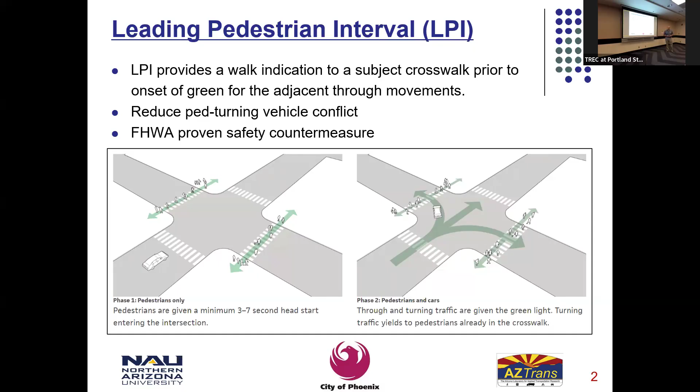All right, okay, so for those who may not be familiar with what a leading pedestrian interval is, it is putting the walk indication up 3 to 7 seconds before the concurrent green indication comes on. It gives pedestrians a chance to establish themselves out in the street, making themselves more visible, and also can give them a chance just simply to get off the curb in some areas. So these are used in a lot of areas in Portland, and it's a proven safety countermeasure. It helped us reduce that conflict between pedestrians and turning vehicles.

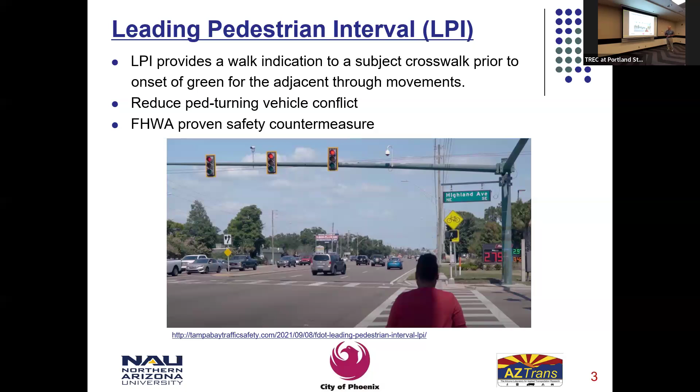Here's a picture of one of these in place. So we've got the walk indication up, and the signal indications are still red. So Phoenix wanted guidance on implementation of these, right? A complaint comes in from an alderperson: we've got a challenge at this intersection. Funds are limited. Even though these look very simple, just a simple signal timing change, there actually can be a lot more to it based upon the configuration of the intersection, existing equipment, things like that.

So Phoenix wanted a way to look at site characteristics and identify a way to prioritize locations. So we did a literature review just to see what was out there, because there are various other documents out there. City of Portland has one. We did a crash analysis, and there were two goals of the crash analysis. One is to get an idea of how intersection characteristics that we might have seen in previous published guidelines have impacted crash frequency in Phoenix, as well as to allow us to prioritize locations in the city for data collection, as we wanted to do a before and after study with and without an LPI.

We identified sites, we did volume analyses of these, collected data, and then did manual reduction to identify user behavior changes, a bit of modeling, and then we developed a guideline for the city.

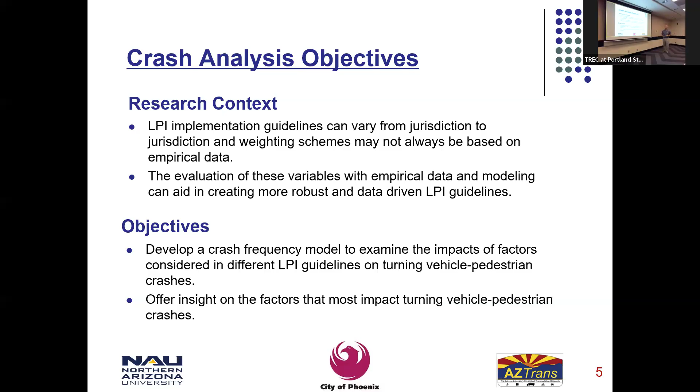As I noted in the previous slide, we wanted to identify the impacts of factors that have been considered in guidelines, as well as allow us to prioritize locations for data collection. So as part of the crash analysis, our students looked at all the intersections in the city of Phoenix. We had crash data from 2016 to 2022. We were looking at turning vehicle pedestrian crashes. We had just under 800 of those, and just under 2,000 total pedestrian-involved crashes.

Just for clarification, Dr. Russo led this part of it. So anyway, if something's wrong, it's his fault.

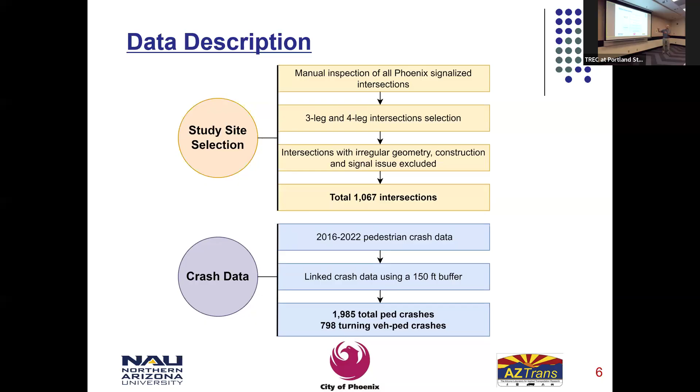Are there push buttons? Push buttons are an interesting thing because in a lot of locations in Phoenix there are push buttons, but they don't work. It just runs in pedestrian recall. For those that don't know what ped recall is, it's where we automatically bring the walk indication up every time with the concurrent green indication. Not sure why that's the case, but that's just part of the environment. Was there protected phasing? Are there exclusive left turn lanes? And some other items as well.

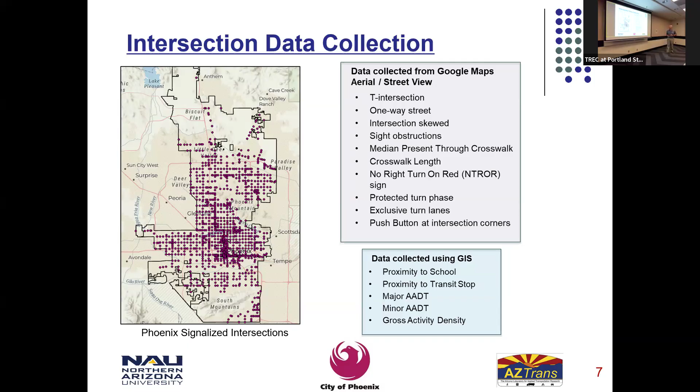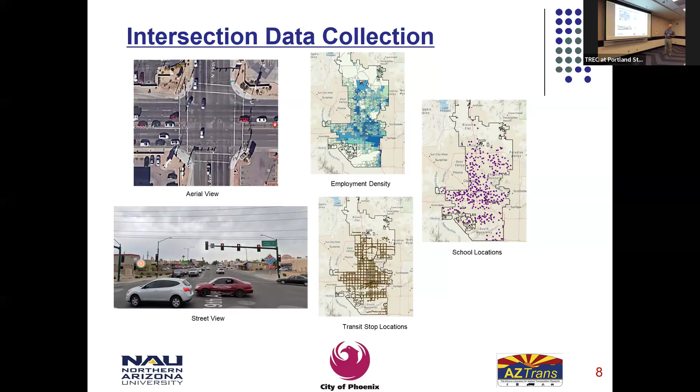So just a couple of pictures of what we pulled from this. So here's our locations of schools, transit stops. Google Street View and aerials were very helpful. As always, there's things that don't make sense when you look at that. There's construction, but we kind of worked through that. And then there's our employment density as well. So just some summary statistics from what we picked up.

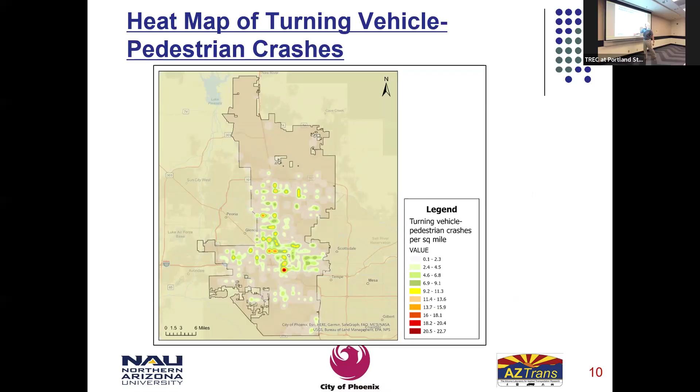Here's a heat map of our turning vehicle pedestrian crashes. This is our downtown Phoenix area. And then you do also see some other activity centers kind of around there in the uptown area. And here's another area where we have a reasonable amount of commercial activity.

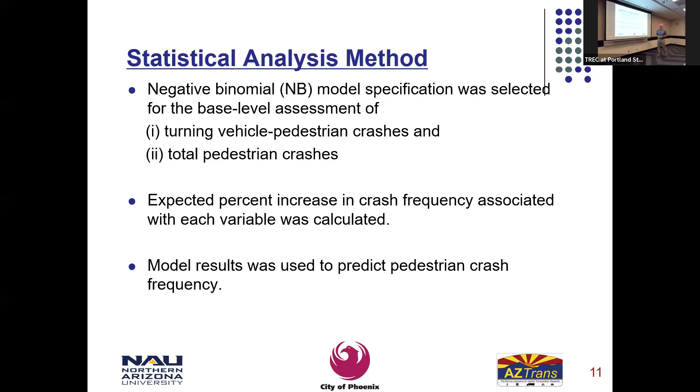Negative binomial models were used to look at the crash frequency as well as predict pedestrian crash frequency. And then we're looking at turning vehicle pedestrian crashes. So really looking at outcomes of the model, we see that if we have a crosswalk on four legs, we're much more likely to have crashes. Makes sense, more crosswalks, more conflicts, which is really, when you're looking at a model like this, you're asking, do these things really make sense?

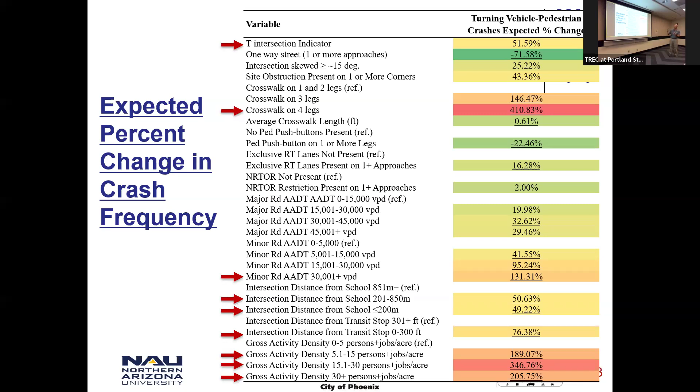Higher volume on the minor road, higher chance of having crashes, more activity, right? Although kind of that middle spot was our highest amount. And then our T intersection indicator was up here with 50% change. Again, a lot of these things actually appear in other LPI guidelines. They weren't specifically selected because we saw prevalence of them in the city of Phoenix.

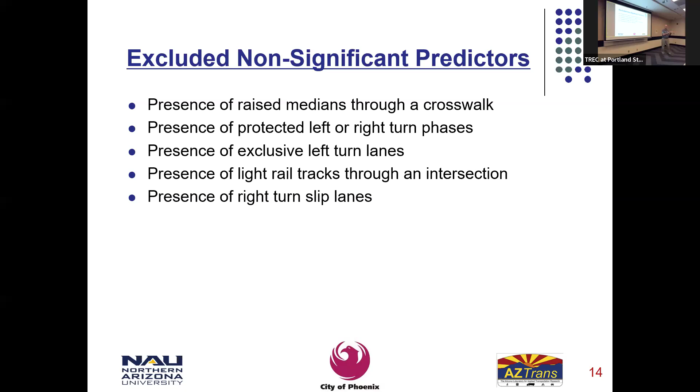Some of the things that were excluded: raised medians, right turn slip lanes, light rail tracks in the intersection, exclusive left turn lanes and protected right or left turn phases. These were not significant. If you haven't been to Phoenix in a while, we do have light rail. It doesn't cover a lot geographically, but it goes a long way, if that makes sense. It's probably 25, 30 miles from the center of the valley down to downtown and out to the eastern suburbs. So we're slowly building that network.

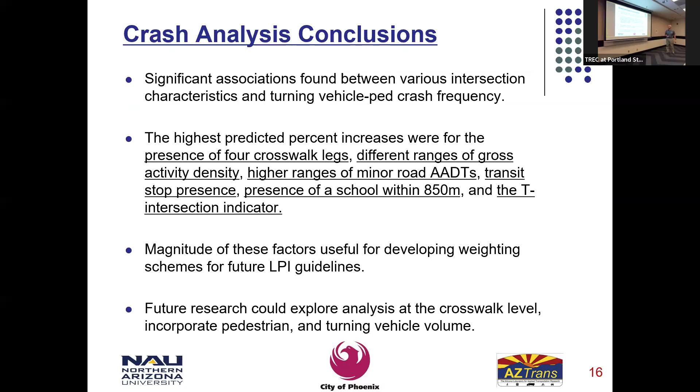Okay, so first we want to see what impact on expected crashes various intersection characteristics had, and the other purpose of the crash analysis is to get an idea of where we have a lot of these crashes as good locations that could be fruitful for the before and after study. We want to make sure that we have exposure, that vehicles and pedestrians are crossing paths often enough that we can actually get some good before and after data from it.

So the intersections that we selected are listed right here. We ranked them from highest to lowest crash frequency, and then we iterated with the sponsor on which ones made the most sense, what was going on around those intersections, things like that. Most of these are out in outlying areas, not really in the downtown area. Washington and 3rd Street is the only one that really is right in the downtown area.

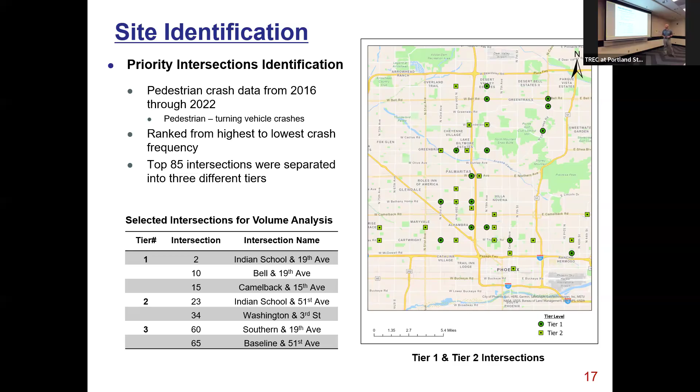So then, at each of these intersections, the city of Phoenix collected volume counts for pedestrians and turning movement counts from 12 to 1 and then 5 to 6 p.m. And when we look at the conflicts that a pedestrian has in the crosswalk, if I'm on this east leg crossing going north, I've got to watch out for vehicles that are turning northbound right, westbound right, and then southbound left if I have permitted phasing.

So as part of this analysis, certainly we looked at the number of pedestrians and number of turning conflicting vehicles, but we also did the cross product. And the cross product is something that you'll find in traffic engineering in other places. Specifically, one location is when we're looking at possibly installing left turn protection.

So with my left turning vehicles, I can use permitted only phasing if I have ample gaps coming at me in the conflicting through movement, right? But once I get to a certain number of vehicles coming at me in the conflicting movement and then turning left, there just simply aren't gaps available. The cross product is one of those things that's been used in literature in that area. So we looked at that as well here too.

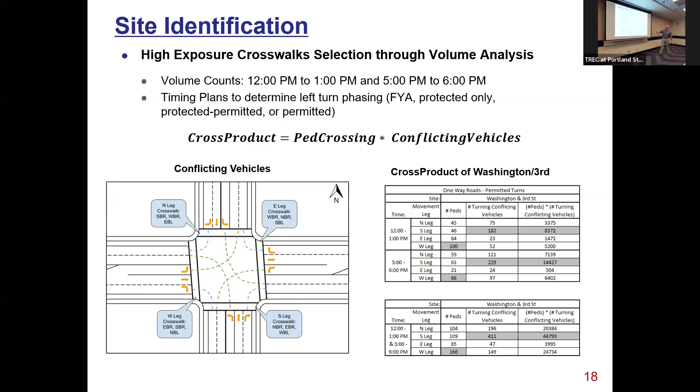So very simple. We looked at each leg during the two time periods, and then just looked at which ones had the highest cross product. Went through and just sorted those. We wanted to make sure that we had no more than 2 legs in any given intersection. We didn't want to have all our data collection at one intersection. We had a total of 8 locations budgeted, so 10 hours data before, 10 hours after.

So you will see that we did include Washington and 3rd, even though it is a little bit farther down the list; again, the outlined ones are the ones that we went with. This is one that our sponsor requested be part of the analysis, right downtown. It actually does have, by far, the most number of pedestrians, it just doesn't have that many conflicting turning vehicles.

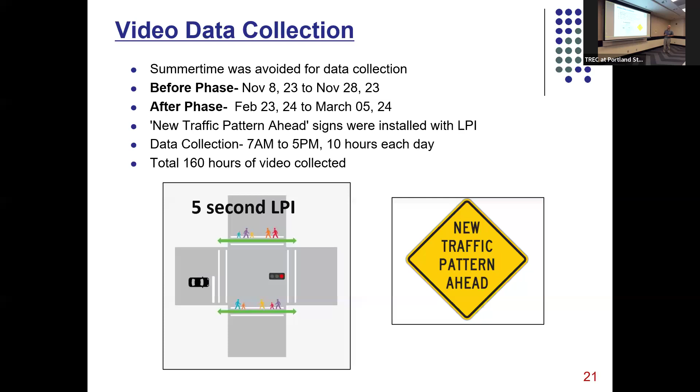So for data collection, we did post-encroachment time, right? Crashes are fortunately rare, and they're also random occurrences. And typically, if I want to identify the change in safety that some sort of countermeasure or geometric change will have at a location, I want at least 3, preferably 5 years of crash data before and after. That's not realistic for a study like this. So we use post-encroachment time. Post-encroachment time is simply the time difference between when one user vacates what we term a conflict zone to when the other user arrives there.

Okay? And when you look in the literature, typically you see if a PET value is less than 1.5 seconds or so, it's termed a severe conflict. 1.5 to 3.5 seconds is a moderate conflict, and then 3.5 seconds or greater is a minor conflict, right? Which doesn't really tell the whole story, because if one of these vehicles is standing still and the other one is moving, is that really that severe? So anyway, this is what we went with.

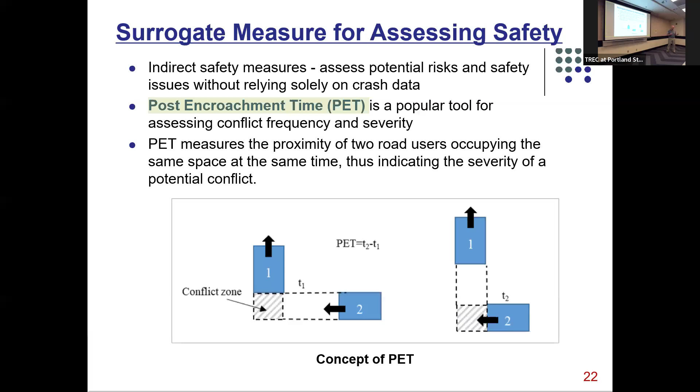What TTC is out there. Our time to collision, we chose to go with this one just because we thought this was the best thing we could get with the data collection techniques we had available for us. Right. So here's an example interaction. We've got this Nissan parked here in the crosswalk, just waiting to turn right. And then there's our pedestrian walking across. And then the vehicle goes ahead and turns right.

Does that look like a really severe conflict? Not really. I mean, presumably, this person, I'm a runner, and so I would make eye contact with this person if at all possible, or make sure that they see me in some way, shape, or form, right? So yeah, that's just one example of thousands of these data points that were collected.

One thing I will point out, and this is on our last slide, our limitation, is that at the onset and at the budgeting portion of the project, we were expecting to get event-based data out of the traffic controller. So we expected to be able to get the on and off times of all the phases, the greens, yellows, reds, walks, flashing don't walks.

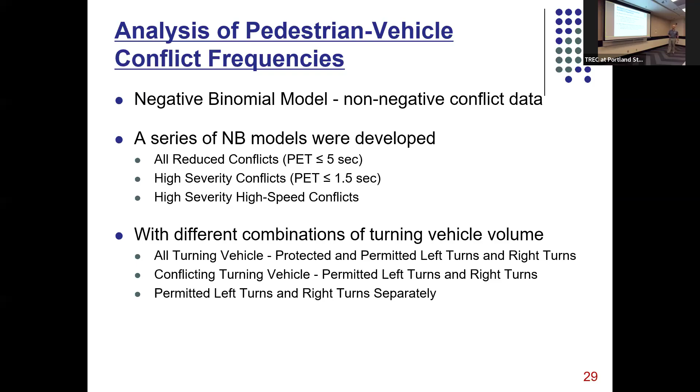This is what we mean by data-driven in the title of this presentation: this information, number of turning vehicles and pedestrians, went directly into our guidance that we provide the city of Phoenix.

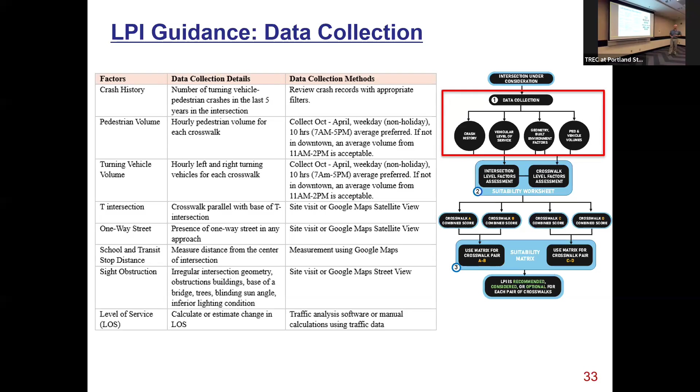So we've collected the data, right? And now we're actually pulling together a score sheet to get to a certain number of points. Based on the number of turning vehicle pedestrian crashes you have, if you have 3 or more crashes, you have 3 points. 2 crashes, 2 points, 1 crash, 1 point. If there's nothing, 0.

One-way street. Why might a one-way street be on this sheet? Well, driving behavior changes, right? When you have nobody coming at you and you're turning left or right, you're not acting the same way because you're not looking for that conflicting movement. So you may not be as observant to other things out there. Intersection distance from a school and transit stop: we've got more activity, it's more likely to have people out there.

And then the last one is travel delay. This one we went around the room quite a bit, and with Phoenix, to get to a level of what we use for a penalty for travel delay. This can be a contentious subject, whether you should have anything in here at all. It really depends upon the agency. One of the things I talk about in my traffic engineering class is trade-offs. Everything is a trade-off in traffic.

I-17 is the main freeway, the only freeway that goes from Flagstaff to Phoenix. On one of the slides I have a picture of a speed limit sign that says speed limit 80. We only have 75 in Arizona, but it says 80 and speed limit 10. And I say, well, what happens to safety if I bump the speed limit down to 10? It's going to increase, right? Well, still a fatality because someone will probably have a heart attack.

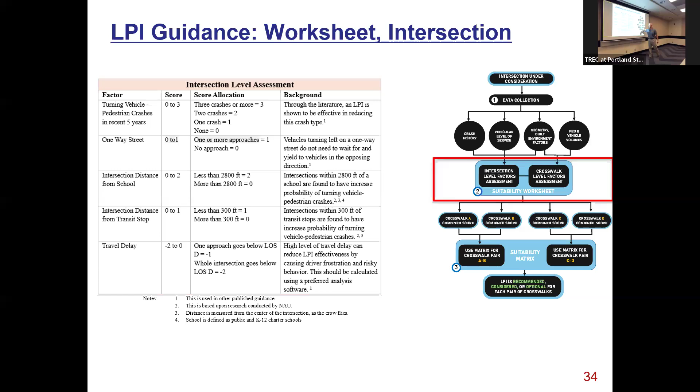But is that reasonable? Is it reasonable to ask those facilities to operate at that? So I take my 2-hour drive to Phoenix and turn it into a 15-hour drive. Everyone has different opinions on that. That is why we have a travel delay penalty. So when one approach goes to a level of service D, there's a reduction of a point. If the whole intersection goes below level of service D, you drop off a couple of points.

Looking at the crosswalk level, this is the modeling that we did: our pedestrian volume, looking at what our break points were. So more than 100 pedestrians, we have 3 points, and so on and so forth. Turning vehicle volumes, 100, 400, and 600 were our cutoffs for that.

T intersection. This is similar to that one-way intersection where if you're in a T intersection, you may not have conflicts from all directions. So you might have a higher vehicle speed. You're not waiting for traffic. Sight obstruction or a skewed approach: if you're looking over your shoulder like this to make your turn, you're maybe less likely to see the actual pedestrian that's out there.

One thing you'll note, you'll see our footnotes down here, items with a 1. This is used in other published guidance. So part of our literature review is to dig in and see all the different types of guidance that were out there. There's generally 2 types of guidance. There's prescriptive and descriptive. Prescriptive is something similar to this with a score sheet, and descriptive is more flowcharty, where there's just kind of, well, this is going on, you should look at this, consider that. We try to hit right in the middle of that. Items done by us, and then there's also some information on how to actually collect the data that you're going to use.

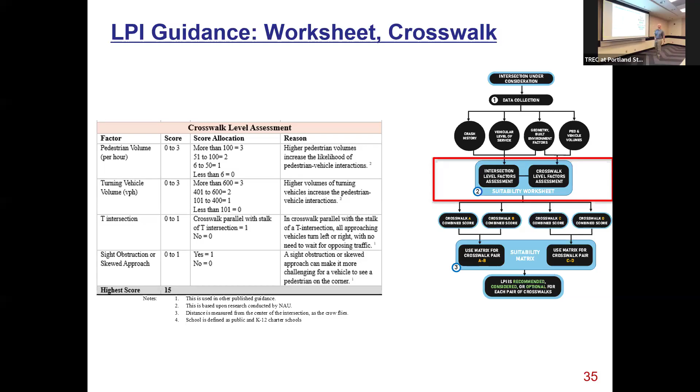Right, so once we have scores, we take the scores, and we always evaluate crosswalks in pairs. Why would I want to do that? Well, you want to implement it in pairs. We looked at this from a standpoint of making sure that the walk indications come on at the identical time on both sides of the intersection for those that may be using the sound of the vehicles to start to cross. And that's a whole other discussion with an LPI. But that was one of the reasons we went with that.

So we look at them in pairs, and we pull together scores, and then we determine, and this is where the legal wording comes into it, whether an LPI is optional, considered, or recommended. We chose those 3 words specifically because we're aware that this is a proven countermeasure. But it's not reasonable, or may not be reasonable, to put these at every location in the city.

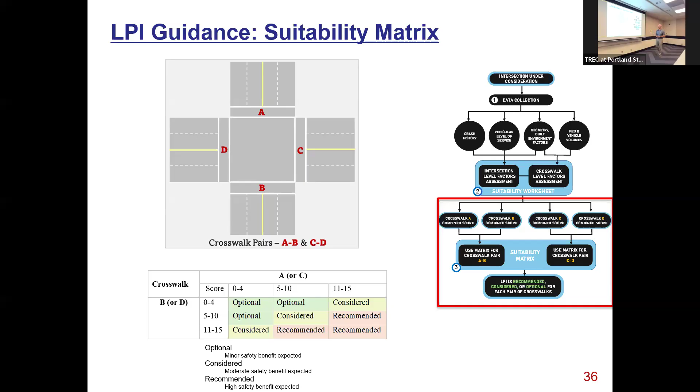At locations with LPIs, left turn protection should lag the through movement only. We actually saw this in our implementation process, where people would continue to turn through the all red into the LPI if there was a protected arrow prior to that LPI. Flash yellow arrow: hold that indication red until the LPI ends. We used 5 seconds. You can use different durations for this.

Number 7 is something that I will admit, and from talking to Simon, our contact at the City of Phoenix, most of Phoenix runs coordinated to a big grid. So your analysis for the vehicular delay can't just be at that one intersection. You really have to look at the whole corridor. Because if you're changing the onset of the green by 5 seconds on a coordinated movement, if we just do the one location, that's going to cause challenges up and down the corridor. So there's a bit more to it.

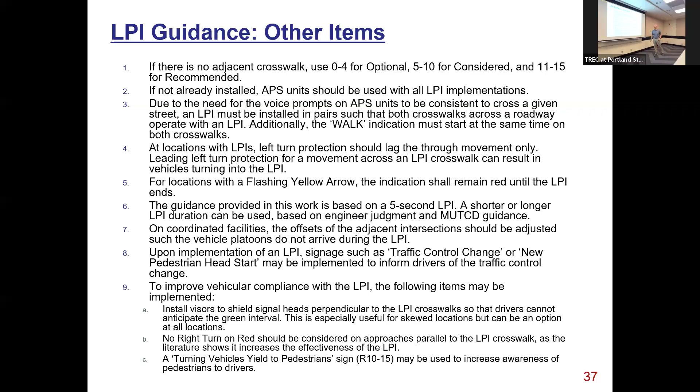But as I noted, there was also a lot of other good information in this project. One of my students, he's a PhD student now, Tony Yeshin, spent a whole summer waving his hand in front of a pedestrian push button. In our lab, we hooked up 2 different push buttons from 2 different vendors, and then just looked at, if you waved your hand here and there, how many times did it actually activate. He actually broke Steve Gerke's space heater because he used it to heat it up, because what happens in Phoenix? The button gets hot. Does it change behavior, right? We turned the lights off, did all sorts of stuff.

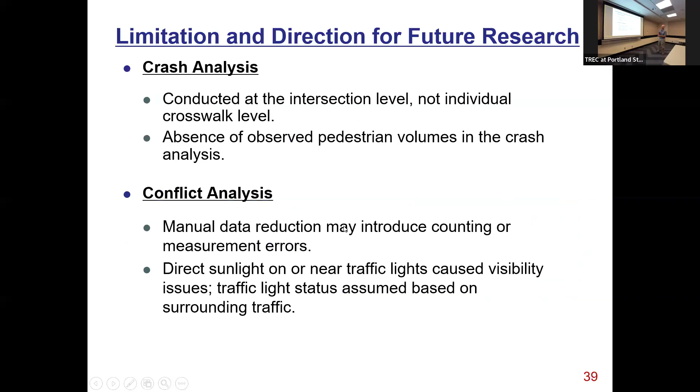The crossings you chose, were they crossings of major streets or minor streets or both? So the crossings were all pretty much major streets, driven by our crash analysis, where we had the most issues. I'm going to insert a quick question here that was related. Did any of these have median refuge islands? Let's go look. There we go. I wouldn't call it refuge, but you could. Phoenix doesn't do, at least at none of these locations, a 2-stage crossing. Okay, question in the room?

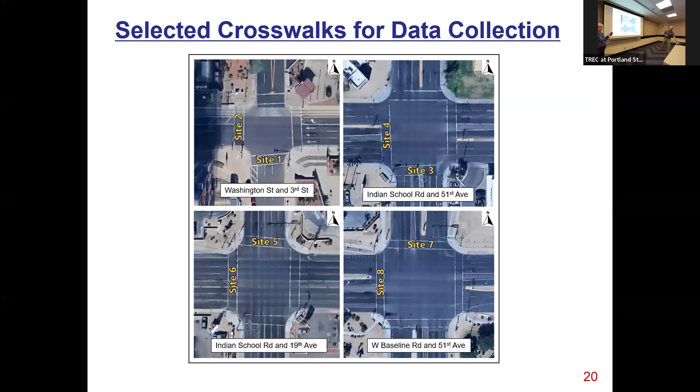What was the average crossing time of pedestrians? So these are typically 110-foot streets, so 3.5 feet per second, 110 divided by 3.5, 25, 30 seconds. Yeah, but you didn't measure how long it took the people to get across. We did have a speed. I don't know if you gave the data. Yeah, mean pedestrian speed. So it's pretty quick. I'm sure somewhere in your analysis you have how long it took them to get across. Travel time.

I don't think we measured that. I don't think we measured time from when they left the curb to when they got across. It's just interesting with LPI. It's like, okay, does that change it? Like, what is 5 seconds of a 40-second crossing, or for older adults, it might take longer. Yeah. I mean, you could extrapolate it out based upon that, but that's just based upon a little bit of.

Okay, I'm going to pick one of the maybe meatier questions here. It looks as though you considered each intersection as an independent site. However, some elements are bound to be related. For example, driver frustration because of delay is bound to be cumulative across the network. Do you think your results might vary if you were able to account for spatial relationships or dependencies among intersections? You did acknowledge that this is a network, but...

I mean, any study is going to be improved if I have access to more variables, more data to understand that, right? It's a good idea for something that will be funded by a UTC or something like that, but I can't see a city wanting to fund something like that. That's a great idea. It's a reality of research there.

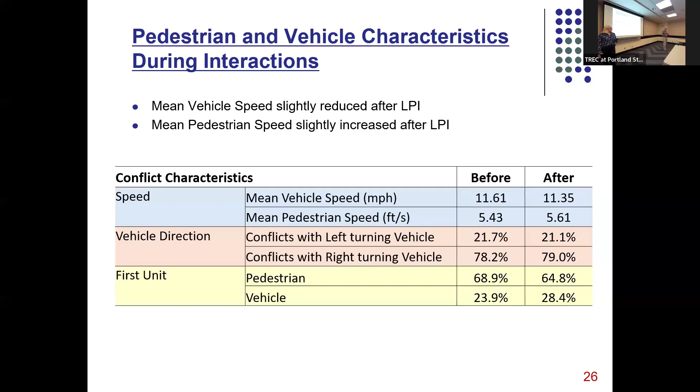And since we are just over our time, I'm going to do one more inside the room question. One of the charts that you showed had volumes of pedestrians up to 700. Yes? So that was turning vehicles. It's turning vehicles. Yes. What was your highest pedestrian volume? At one of our sites, Third and Washington was the highest at 166. But this is in 1 hour. Okay, so I'm wondering about driver expectation.

If I'm on the road and I need to turn and I have 166 pedestrians an hour, I can expect pedestrians. So would you recommend using an LPI in those locations where it's expected that pedestrians are going to be there? I'll go back to my earlier comment where we only operate them where they're going to make the most impact, certainly in a network like Phoenix. So I wouldn't disagree that if I have that many pedestrians downtown, maybe I just run the LPI all the time, or at all my locations downtown.

Or why run it at all? I see where you're getting at. So I always have pedestrians out there, they're always going to be there. But I think one of the benefits of the LPI is it allows people to get off the curb if I have a large turning volume of vehicles. So I think it would still have that benefit. Okay.